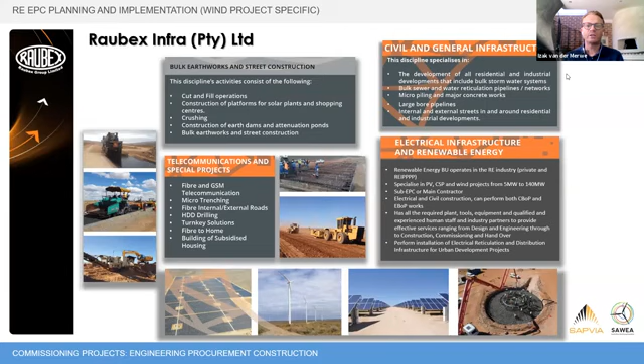Next slide please, and now we jump right into the meat of things. I need to warn you up front, I may be making some controversial statements, but I felt it might be necessary at this stage, so that everybody on both sides of the fence - and when I talk about the fence, I'm talking about client and contractor - can get a feel of what the other one's opinion and view is.

And the kind of challenges that people experience out there. So the first thing, and I've split it into two, both the planning and the implementation phase, to look at some of the things the developers are doing and should be doing, and then also what the EPC contractor are doing and should be doing.

So firstly, developing a project on Google Earth. We know this is where it starts, this is the best resource we have to actually develop projects. So logically it makes a lot of sense, but during the planning phase we eventually have to go to site as the developer, even during the writing of the employer's requirements and during the development phase, to actually get a much better feel for things on site.

One of the things, and I'll show you a later picture as an example when it comes to environmental approvals, is the road width, and more specifically not only the road, but also the environmentally authorized area within which the road and the V-drain for stormwater management, as well as the collector circuit cables, are normally placed. That needs to be considered right from the beginning as part of your environmental process. Otherwise you have massive problems during your construction phase.

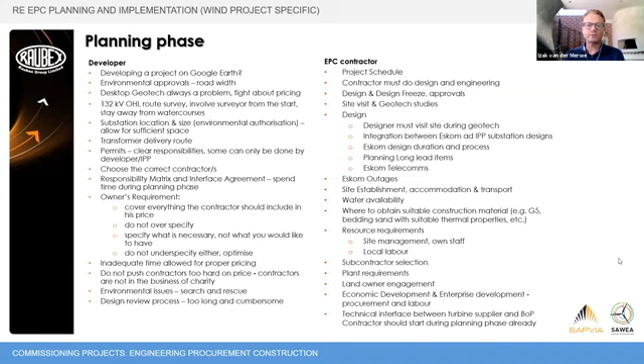Also, economic development and enterprise development, both procurement and labor, is something that gets planned right up front before you start with the implementation phase. And then another item that normally gets left behind is the technical interface between the turbine supplier and the balance of plant contractor. Not so much on the civil side, even though, for example, bulk cable deliveries are quite critical, but it becomes very important on the electrical and especially on the SCADA interface side, that you start looking at that right from the beginning.

And then we get to the implementation phase, fewer points on the developer side, but this is another controversial one. Please, developers or main EPCs or wind farm projects, please ensure that you appoint experienced owner's engineers with construction experience for your site supervision. It has happened.

As I said in the beginning, I've been involved in quite a few wind farm projects, and every time you get to a wind farm where someone performing the owner's engineer role for site supervision has 2 or 3 years experience, never built a substation or an overhead line in his life, it becomes a situation where you spend 60% of your time educating this person instead of building the project. So please make sure you use experienced people, because it benefits the project. It doesn't benefit the contractor, it benefits the project to use suitably experienced people for your site supervision.

The next one is, please do not manage the project with contracts or non-conformance reports. There must be a personal and human touch when we execute these projects. Too many times you have a situation where people come to site with a big ego, and it becomes a permanent fight to actually build that project. You can actually reduce the time to build the project to the same quality and same standards, because you're doing it to the same specification and design, in a lot shorter time, if people have the right attitude and are coming to site to work together and really mean it, work together, not say in front of me we work together, but then you go back to your office and 10 minutes later the email comes into your inbox completely the opposite to what's just been discussed.

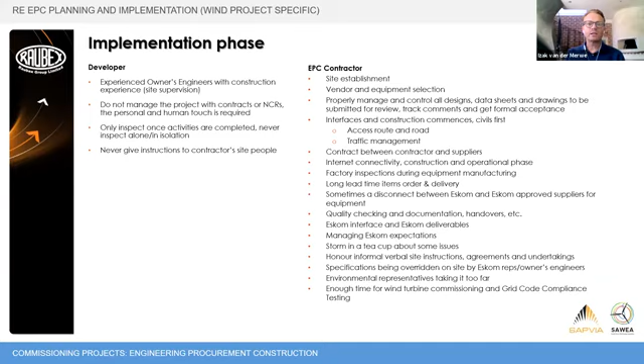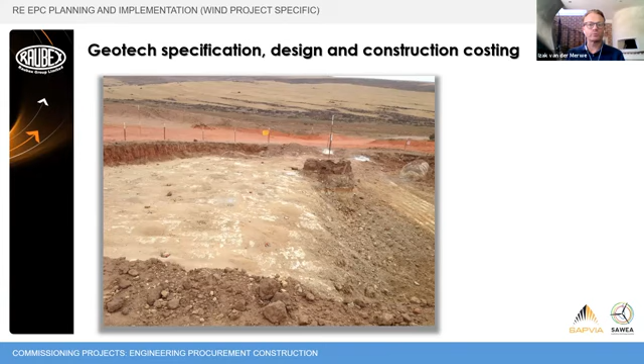So what happens when some of these things go wrong? Just a couple of photos. This is a typical example: the geotech was done, it showed no problem, soil conditions perfect, but when the excavation started, all of a sudden there's a massive rock and some blasting had to be done. All of a sudden there's more than a 6-week delay on the project because of all sorts of approvals that had to be done.

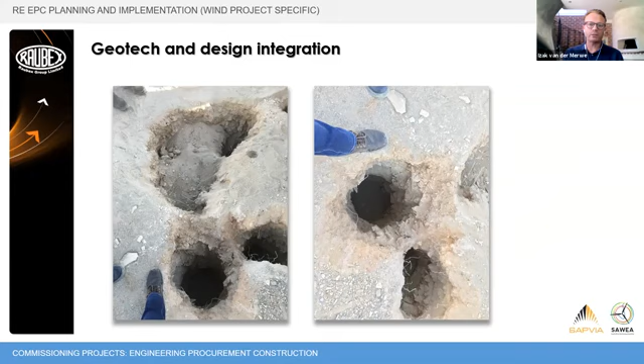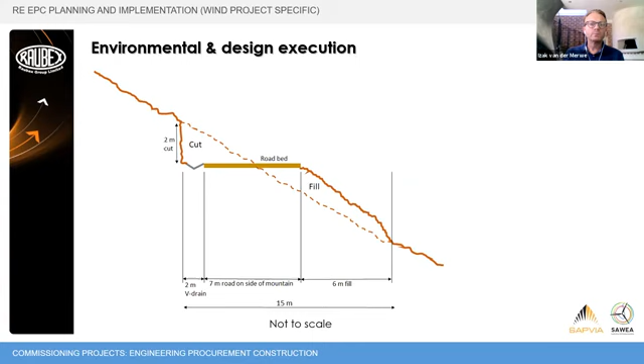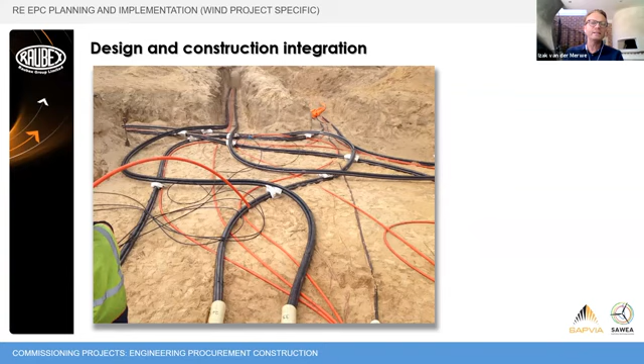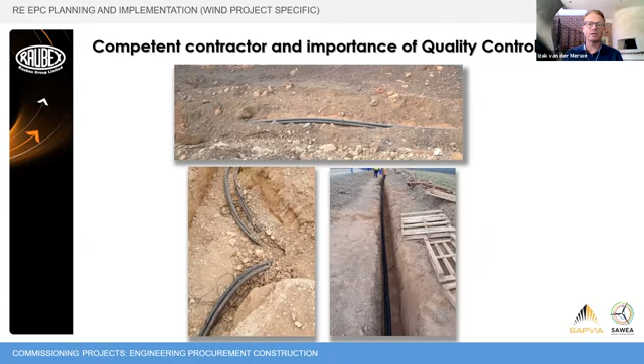Here, for example, is where you need to make sure you've got the right contractor. The top one has no excavation, just the topsoil scratched away a little bit, and the cable is lying on top, with the contractor planning to just put a little bit of sand on top. On the left is a proper trench, but as you can see, lots of small stones almost tennis ball size, so that cable will be damaged. On the right hand side is an example of a proper cable trench.

Quickly on risks: the pressure on price, in my opinion, is becoming too high. And what happens then is standards go down, because you start to optimize into stupidity - sometimes you do things for the sake of getting the price down. Yes, the bid price is important, but at some point we need to realize we still need some standards to comply with, and we have to let go of the pressure on price a little bit.

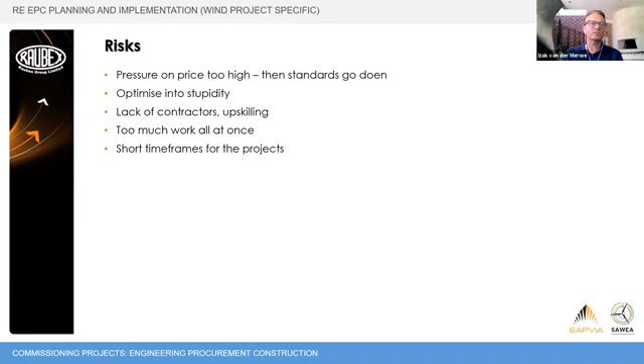Also, I believe there's a lack of adequate contractors, especially now with the risk mitigation round, and round 5 potentially also having to connect by the end of next year. So I think we may be in for a rough ride at this stage. Then also, the short time frame of these projects is, I believe, a bit of a risk, and we need to make sure we manage this risk very well.

Okay, opportunities. I think the development of local labor and the pools of skilled and semi-skilled people is very good, but I don't believe that it should be site-based. I think we should be creating a core of skilled and semi-skilled workers that could be used by the different contractors, because one of the problems that we sit with is we as contractors move from town to town, and we appoint people, and we develop them, and we turn them into semi-skilled workers, but when the project is finished and you move away, they are left stranded right there, still living in the same town, and these newly acquired skills go to waste.

Then also another opportunity is that of split contracts, not to have a main EPC, but to have a BOP and then a TSA contract. Then also we recommend that we start to engage with Eskom, that the EBOP contractor actually commission the Eskom self-built works as well, with Eskom only witnessing the works and not having to do the actual commissioning as well. We believe a lot of time can be saved that way, and it can also help Eskom with capacity.

And then also, I see there's a lot of opportunity, especially these days with multiple developers working on project clusters, to optimize the grid connection design and to optimize the Eskom network expansion that needs to happen for these clusters as well. That's it from me. Thank you very much.

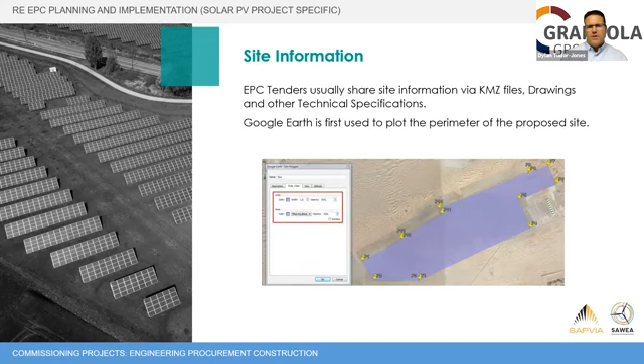So as Izak mentioned earlier, generally tenders for EPCs get launched whereby the IPP puts out a document pack, and in that document pack, there are KMZ files from Google Earth. There are drawings and there's technical specifications. The desktop study then begins by plotting the perimeter of the solar farm on that Google Earth image. Kim, next slide. One back, Kim, you jumped one.

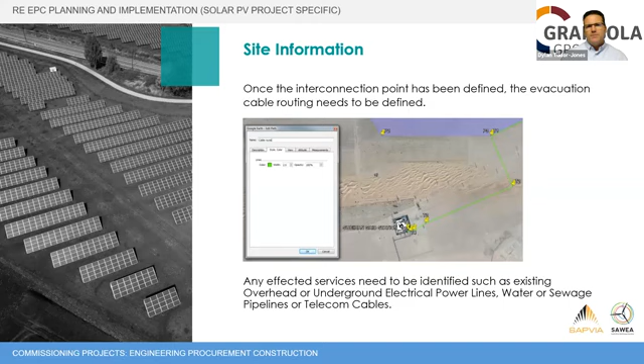Once it has been laid out, then the evacuation cabling needs to be planned. Now, in doing so, one needs to be aware of any either overhead or underground cable routes on the way to that interconnection point, be it a substation or just a straightforward loop in, loop out. Any sewage lines, water lines, telecom cables, etc., all need to be considered. Now, this is what the team does at the office, whilst they then deploy people to go visit the site, which is the next slide.

The point of interconnection is important to go and visit. The access to site needs to be considered. This includes the actual main road, the distance from a main road to the site itself, any information about the road in terms of its road quality, the width of the road, and if there need to be any repairs that need to take place on that road.

If there's any overhead lines which might affect the safe delivery or block the delivery of large trucks with equipment on the back, those need to be noted, because planning needs to be made in advance to ensure that those obstructions are removed prior to the delivery of the trucks.

The other thing is obviously the actual site visit, where you walk around the site verifying the land conditions, because the information which comes in the document pack might not always be true to what's on site. And Izak showed some interesting photographs. I've been to sites where there are large sinkholes which need to be filled in and have to be accounted for, where they weren't clearly defined on the geotechnical studies. Also possibly rock outcrops that need to be considered, or shadowing. So those are the things that need to be identified on site.

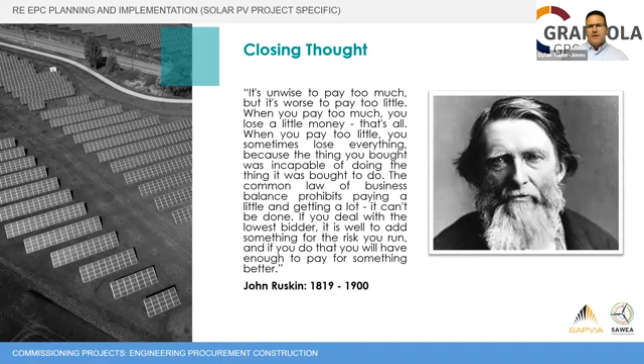Thank you, Ntombi. I hope, as I said, I've caught up for everybody. Oh, thank you so much, Dylan. That was really interesting. I mean, the quote in the end, cheap is expensive. And we see it across the board. Even in personal buying decisions, you buy cheap, you're gonna buy 4 times more because it's gonna break in a couple of days. So thank you for that.

And thanks for a very insightful presentation. I think your focus on solar PV has really given us an insight of the difference between the construction of wind projects and the construction of solar PV projects. So we really appreciate you taking time to educate and share your knowledge with our audience. My pleasure. Thank you for having me.

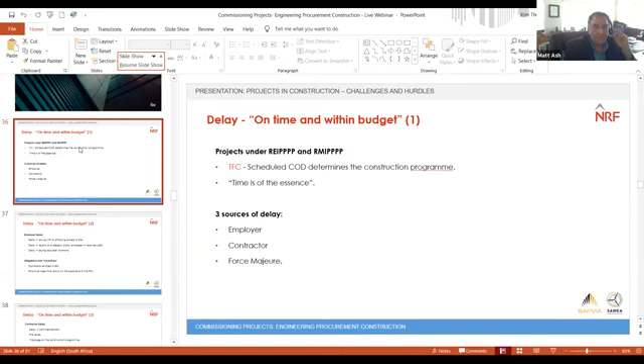Thanks. Okay, so the key catchphrase is on time and within budget. That's what both the employer and the contractor want to achieve. Under the procurements that we're dealing with here in South Africa, REIPPPP and the risk mitigation program, you do have time being of the essence because the time for completion of the project is determined by the scheduled COD that's stipulated in the PPA. So the construction program is informed and directed by that scheduled COD, which means that there's already a fixed target for the delivery of the facility.

What I'm going to do on each of these is to not just point out the problems, but also point out and suggest mitigations and incentives. By incentives, I mean encouragements to the contractor in particular to be able to mitigate or surmount these particular issues. From a mitigation and incentive perspective in employer delays, the contractor is going to be entitled to an EOT. An EOT is an extension of time.

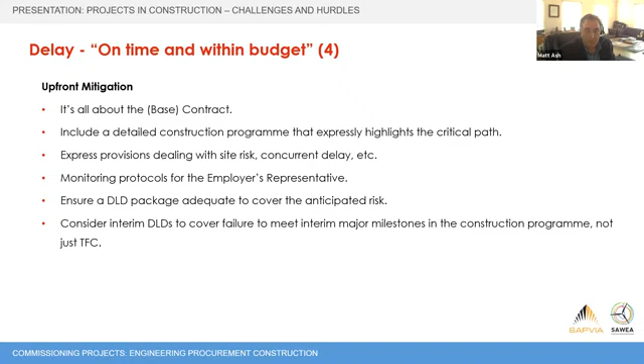So what can one do to try and incentivize the contractor to concentrate its mind to make up the program properly? Maybe not interim DLDs, but maybe, just off the top of my head, a deduction from milestone payments paid into escrow, to say to the contractor, you'll get paid that money if you make it up. So a portion of that draw gets put aside into an escrow account, and you say to the contractor, if you want this money, it's a prepayment of DLDs, and you're going to make up the contract program now. So it incentivizes you. That's just a throwaway, chuck it into the pond for people to consider, and maybe stimulate some discussion and debate.

Next slide, please. Performance. The next slide, please, Kim.

So these performance issues really deal with the performance of the equipment, and the first element is the equipment may not perform properly or as warranted owing to an inadequate or deficient design.

So the mitigations and incentives are, and here is an echo of what Izak had to say, the employer's representative and the lender's technical advisor that is appointed, and the developer has influence over the appointment of the LTA. Those individuals or organizations must be technically qualified and competent to review designs on an informed basis. It makes no sense where, for example, an owner's engineer has great PV experience but is appointed to do a biomass boiler project. Not all animals are equal. You need to appoint a properly qualified ER and LTA that has the experience and the knowledge and has delivered on the particular type of project that you're dealing with.

Just from a design perspective, also, one of the crucial mitigators for inadequate or deficient design is PI insurance. But the trick there is to make sure that PI cover is sized correctly. It's pointless having 5 million rand PI cover where the consequences of the deficient design cost the project 500 million rand. Next slide, please.

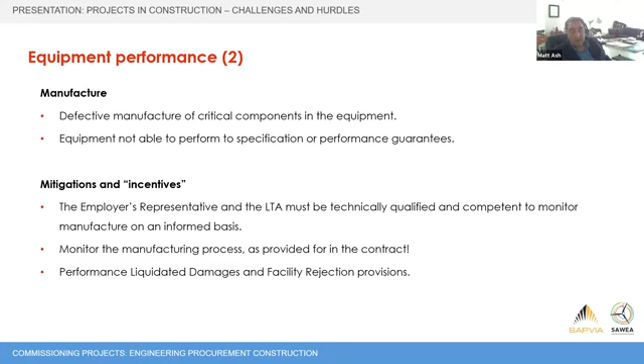So effectively what happens in those circumstances, and that's an all-fall-down situation which hopefully is never reached, it costs the contractor probably around about 110 to 120% of the actual contract price. Next slide, please.

The final element of equipment performance is the installation and commissioning of the equipment. There may be problems in actually installing it. We've seen towers erected incorrectly, or foundations for towers not adequately founded or constructed. Or fixed tilt racks for solar PV modules inadequately founded, or modules negligently racked when installed, which results in equipment failure during commissioning and testing.

Again, I emphasize the employer's representative and the LTA being technically qualified and competent to monitor installation and performance tests on an informed basis. And if you've got the right to monitor installation, testing and commissioning, do it. Give the employer's representative that opportunity.

The mitigations for the employer and incentives against the contractor are, again, if there's a delay, delay liquidated damages. If there's a performance issue, performance liquidated damages. And then there are the facility rejection provisions in the event the facility fails to meet the minimum performance guarantees.

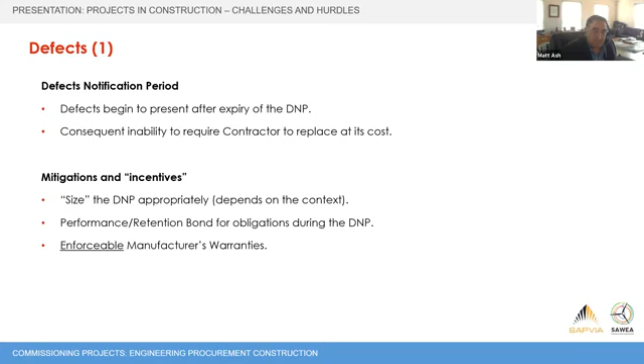Look, a manufacturer's warranty in certain jurisdictions is really only as valuable and dependable as that manufacturer's desire to maintain its presence and position in the market. So if you've got a bum panel produced by a fly-by-night producer, forgive me for saying it like it is, you get what you pay for. That last point is absolutely on the money, pardon the pun, but you're going to get what you pay for. It very much depends on what risk you're prepared to take just because you want to shave price.

Serial defects. A serial defect is the same or similar defect in the same equipment or component within the facility, and this obviously impacts overall facility performance. So what you want to do, from a mitigation perspective, is ensure the contract provisions have percentage thresholds to establish serial defects.

For example, on a solar PV plant, you may say that if the same defect presents within 5% of the modules, either in the whole facility or within a particular production lot if appropriate, then that's deemed to be a serial defect, which triggers a whole bunch of contractual provisions as to how you deal with it.

That involves a root cause analysis and understanding precisely what the issue is, and then once you've determined what the issue is, the contractor rectification plan.

The incentive for the contractor is that if the serial defect delays the project, it must pay delay liquidated damages. If the serial defect, notwithstanding rectification, continues to affect the performance of the facility, then there will be performance liquidated damages.

And then again, even with the rectification, if the facility doesn't meet the minimum performance guarantees, then the facility rejection provisions apply. To emphasize, the enforceable manufacturer warranty is crucial in these circumstances. There have been instances where a manufacturer has been required to replace the entire module deployment of a solar farm because of a serial defect.

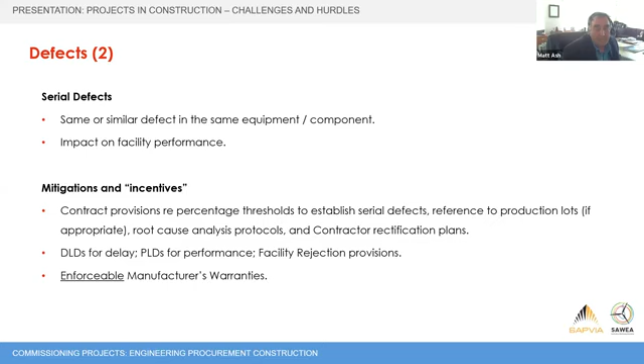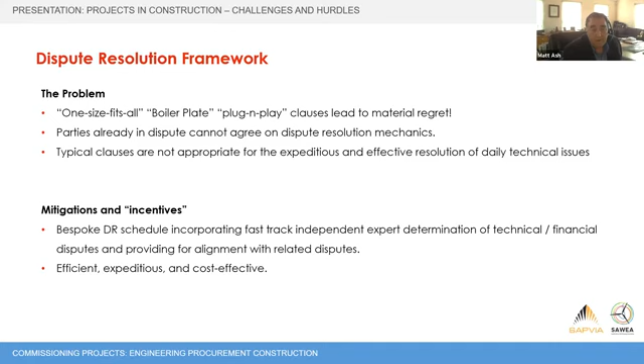Next slide please, it should be the final one. Yep, okay. Do the hard yards up front. Spend time and effort on EPC contract requirements, the particular conditions. And I do recommend that as far as possible employers do hold the pen, because then you're going to be able to determine what you need.

You need to do a proper due diligence on the proposed contractors, and vice versa, contractors need to do a proper due diligence on the employer, although the risk to contractors is much less in that these are project finance transactions, and so it's lender money that's being paid, not actual employer money. We strongly recommend that in the process for the appointment of a contractor, there are tender processes that maintain competition, not just to drive price, but to drive deliverability. You want to keep the process, if I may put it in inverted commas, honest.

And then finally, and this is quite an important point, and it speaks to what Isak and Dylan have both said.

Your selection of professional advisors, that's the owner's engineer or employer's representative, your financial advisors, your legal advisors, they need to really understand the product technology and the consequent particular risks in the project construction phase. I have an old saying: if you haven't touched it and felt it and smelt it, you can't draft for it. So that's from a lawyer's perspective.

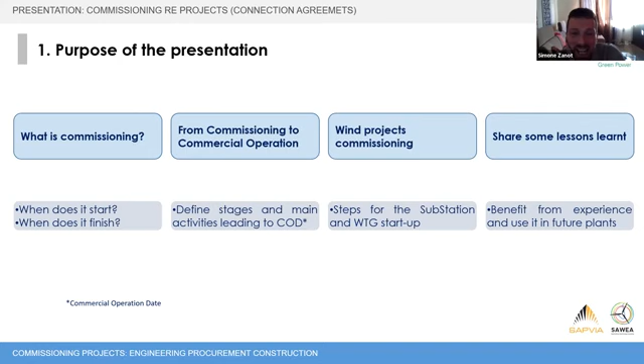So please, next slide. We discussed a bit this word commissioning, but what is commissioning? To explain it, I always use this analogy. Would you ever buy a car which has never been tested before, without knowing the safety parameters, its performances? Well, guys, I guess not. So please, the next slide. We can think about the process of a car before we buy it as divided in three stages.

There is somebody who designs the car, a sketch. Then the sketch becomes reality, so somebody builds it. Then there is somebody who is going to test this car. Usually we saw on TV the crash tests with the dummies, for example, or in this case the emissions test and the performances. And then finally the car arrives at the car dealer, we buy it, and we finally drive it. So how do we translate it into renewable energy commissioning?

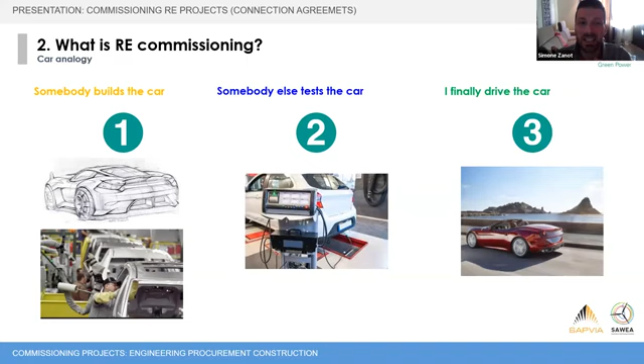Please, next slide, Kim. The life of a project, a renewable energy project, also thermal, whichever project, can be divided into three stages. Construction, where somebody designs and builds the plant, the wind farm, the solar farm, installing all the components that are foreseen in the design.

Then we have the final stage, which is called the operation, that is when in this case, the wind farm, the blades spin and generate electricity, and then we are remunerated. And then actually there is a link between these two stages, which is the commissioning, where somebody is going to test all the equipment in order to make sure that the installation matches with the design, and in this phase some tests are carried out in order to ensure that the final operation performances are met. Please, next slide.

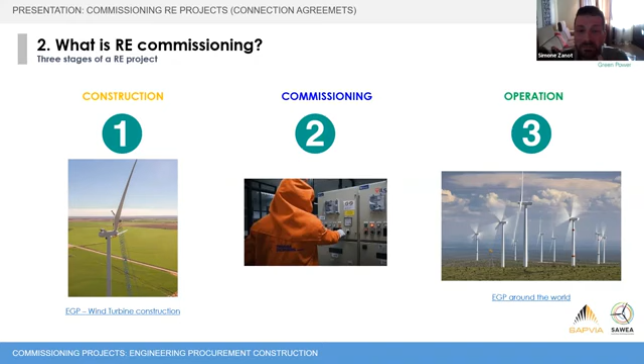Thanks, Kim. Commissioning can be divided into these stages. Cold commissioning, which is the functional checks performed on each single equipment, using also a temporary supply of power and fluids, and these are required after we install the equipment.

After all the equipment and the components of the renewable energy plant have been installed, there is a part called hot commissioning, when the plant is finally energized by the final source of energy with normal supplies. And in this phase, we have to ensure the compliance of all the components, all the systems that we installed into the project with the project specification.

In the hot commissioning is when actually the blades of the turbine spin for the first time and generate electricity for the first time. So first generation, first synchronization. But the plant doesn't pass from 0% to 100% of the generation. There is an interim part called ramp up, where portions of the plant are commissioned step by step, and checks are carried out in order to make sure that the performances are always met.

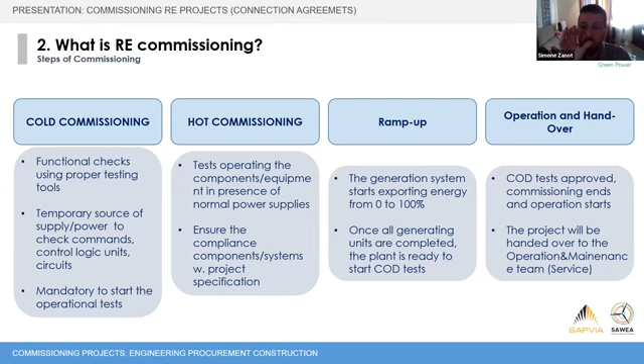So the so-called service contract will be activated at the very end, and the operation is basically when we turn the key of our car, and finally, we ride with the car. So the analogy is now, I think, well understood.

So next slide, please. If we want to translate this into a wind project, or also a solar project: in the cold commissioning, all the wind turbines, all the inverters, trackers, PV modules, once they are installed, they are tested and checked. And there is also another very important part of the plant, which is the substation, which is basically where we step up the voltage and connect with the existing transmission network.

And also in this phase of cold commissioning, the functional tests are carried out, and all the procedures are approved and finalized before starting with the real energization of the substation first, and then the solar field or wind field later, to transition from cold commissioning to hot commissioning, which is the stage when the substation is finally energized for the first time from the external grid.

We supply with power the power conversion unit, with the inverters and the trackers in a solar farm, or the wind turbine generators in a wind farm, via the HV circuits, the HV cables, the so-called collectors, which link the substation to our generating units, either a wind turbine or a power conversion unit. And the hot commissioning is when actually the first electrons flow towards the external grid. We generate for the first time.

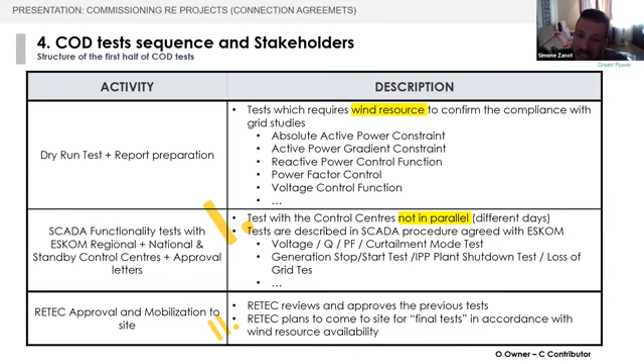Next slide, please, Kim. So in this stage 3, we perform the grid code compliance test with RETEC at site. We perform also an inspection of the wind farm and can assess that the farm is actually built as per design, is performing as per procedures, in compliance with the grid code.

And we are ready for the next step, the fourth and final one, which involves some stakeholders that are the interface with the single buyer office, namely the independent engineer who submits the unit completion certificate, assessing that the requested capacity has been achieved and commissioned, and then we finally get the COD approved at the end of this process.

So next slide. We are almost close to the end, guys. In terms of our main lessons learned that we want to share with you, the process of commissioning is quite complex, and it's fundamental to define owners of certain tasks and deadlines that have to be respected. The person has to have clear in his or her mind what has to be done in which timeline.